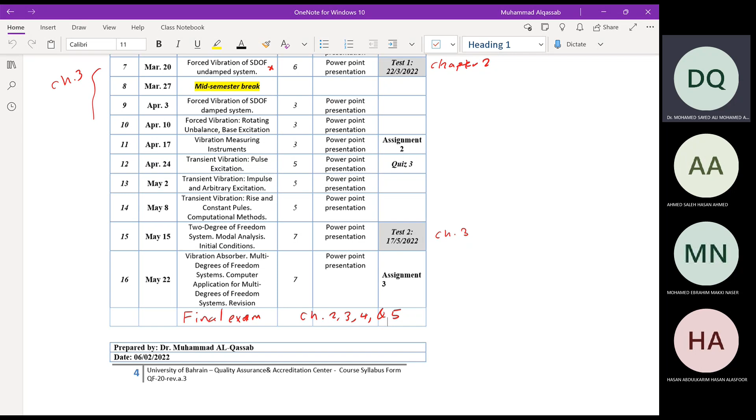Chapter 4 is about vibration, or transient vibration. We saw in chapter 3 that if there is a forced vibration, the total solution consists of two parts: the first is the complementary solution, and the second is the steady state or particular solution. The complementary solution is called the transient solution because it decays with time and vanishes, leaving only the steady state, the particular solution.

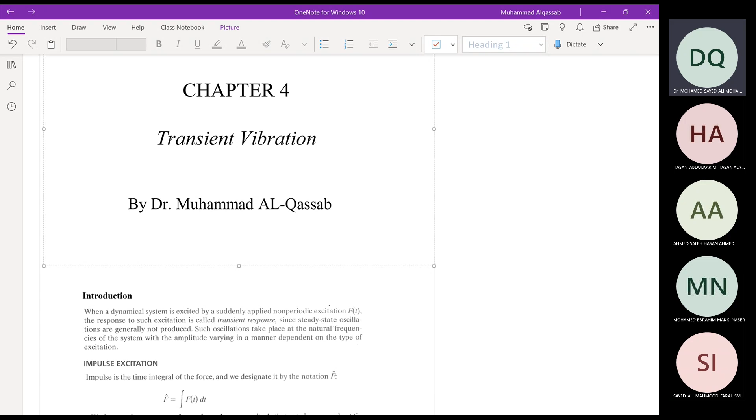Here it is a transient. The reason it is called transient is that it depends on the force. A force applied here will not create the steady state part, the particular solution.

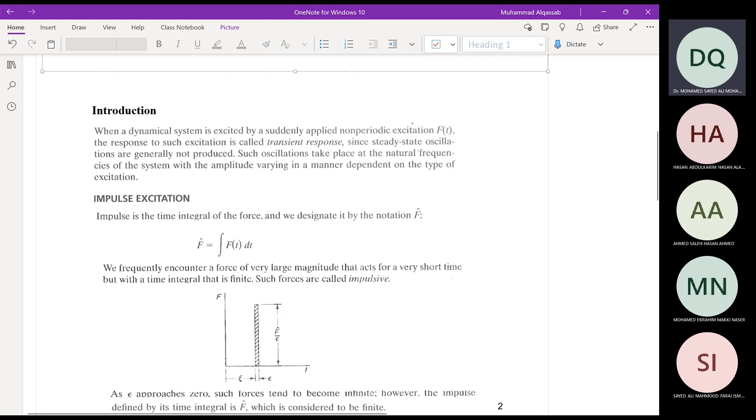The force is applied over a short time or period of time, and then it is removed. It's like a pulse - you put a force and then remove it. That creates a response for the system, exciting only the transient part, the homogeneous part.

The particular solution is not excited, and the vibration will decay with time if there is damping, becoming like free vibration.

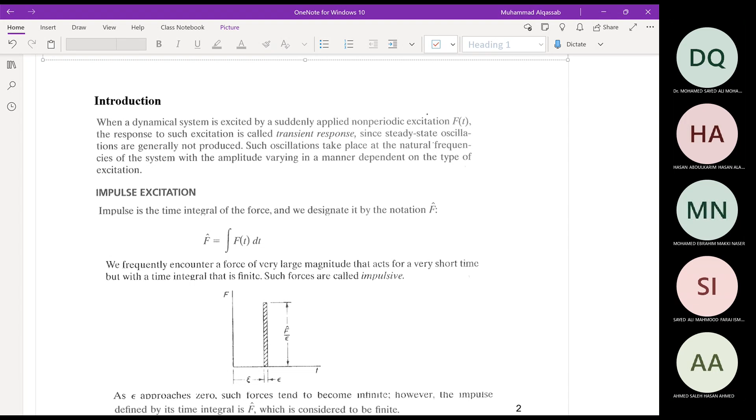When a dynamical system is excited by a suddenly applied non-periodic excitation f of t, the response is called the transient response, since steady-state oscillations are generally not produced because this force is applied over a given period of time. Such oscillations take place at the natural frequencies of the system, with the amplitude varying depending on the type of excitation.

So we will start with impulse excitation, and then we will generalize the excitation to pulses.

The transient here is the response due to a force applied over a period of time, but not periodic - periodic being sine wave, cosine wave, or harmonic forces. In general it is not a periodic force, meaning it doesn't exist all the time and doesn't repeat at equal intervals of time. It's applied over a certain period and then removed.

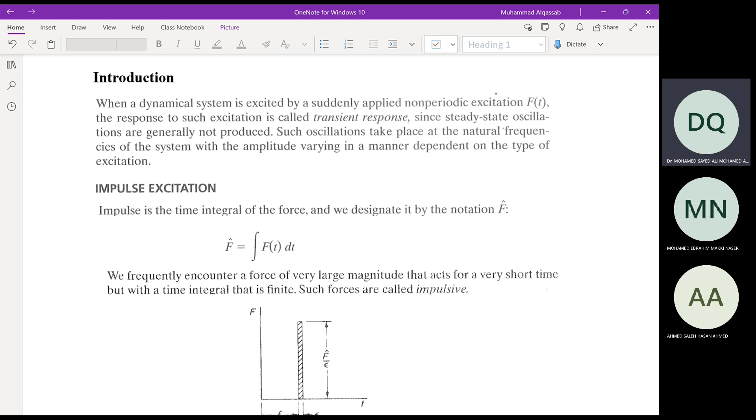So we'll start with impulse excitation. By definition, impulse is the time integral of the force, meaning the integration of f dt over time, given as f hat. That is the definition of the impulse, and the unit of impulse is Newton second.

Okay, because force times time. This is in general—we did this in dynamics, and we use the principle of impulse and momentum in dynamics for particles, maybe chapter 3, I think.

We use a name different, so we give impulse, IMP from 1 to 2. So the impulse means integrating from T1 to T2, if it is over time.

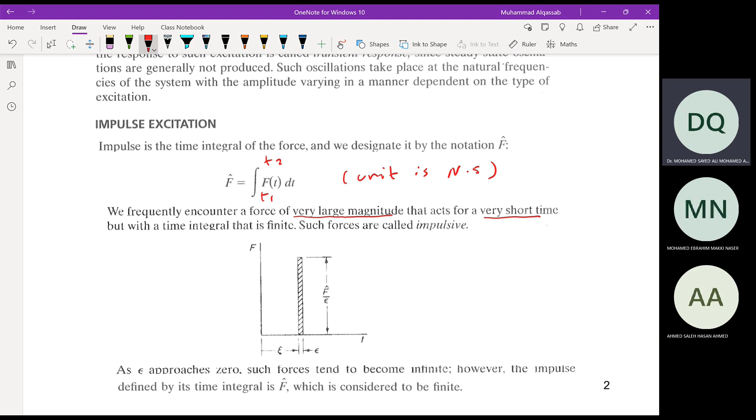Now, if you have a force that is very large in magnitude and applied in very short time, then you create an impulsive force. The impulsive force is very large in magnitude compared with the other forces involved in the system.

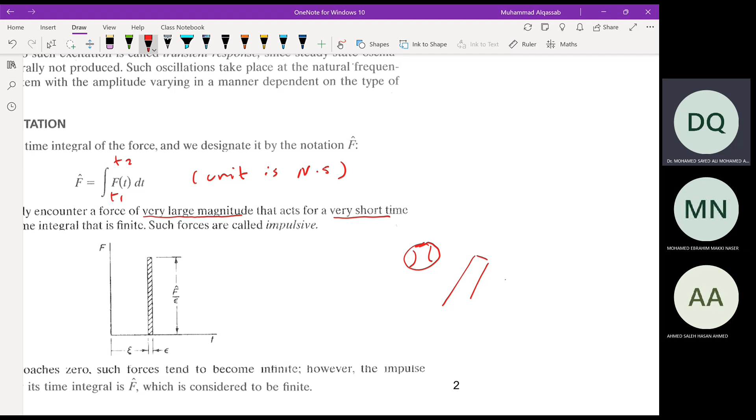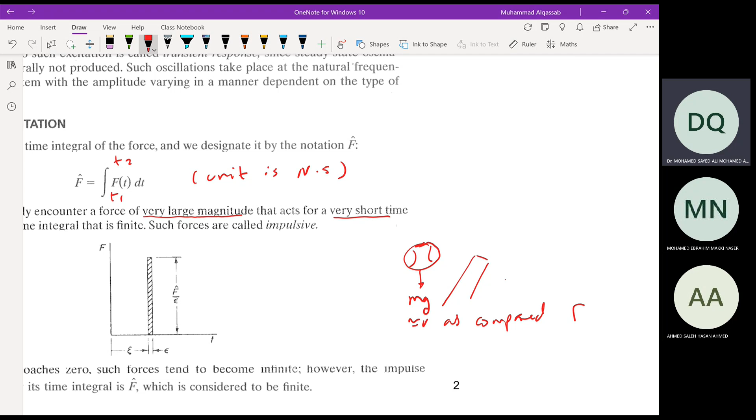An example of this in dynamics is the baseball and the bat. When the bat hits the ball, the force exerted by the bat is very large compared with the weight, so that can be neglected—you can treat it as zero compared with the applied force.

So when the system has a very large force applied in very short time—because with the bat and the ball it will take a fraction of a second to be in contact—the force is high enough to change the direction of motion of the ball as well as its velocity. This is called impulsive force.

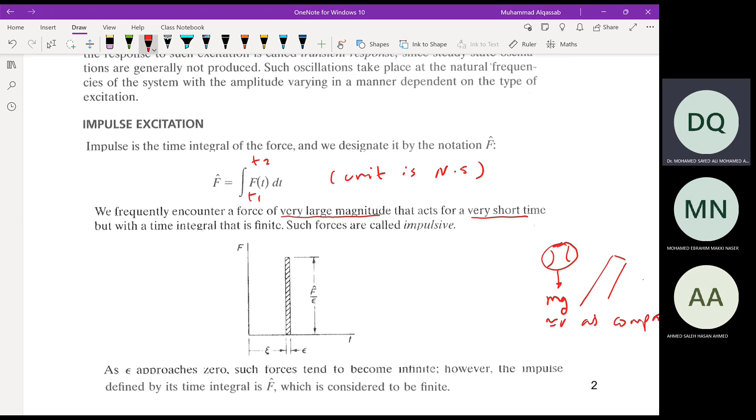We can represent the force over the axis of time. Let's say this is applied at time equal to eta—I will change this character to eta—and duration is epsilon. So it is applied at t equal to eta. It can be applied at t equal to 0 as well, and at t equal to 0 it means it is applied here, so eta equal to 0.

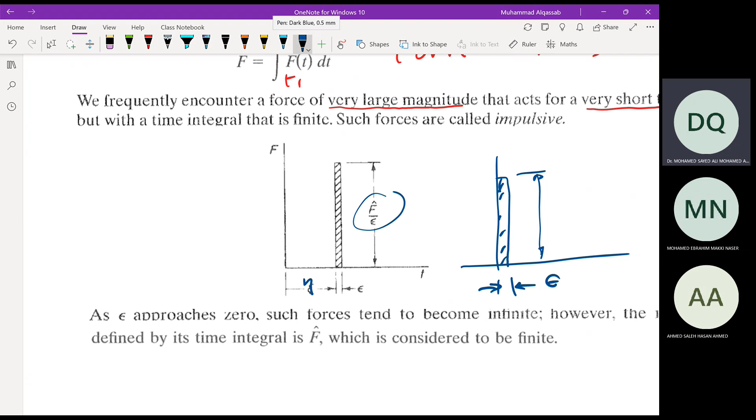The magnitude or the duration is very short, epsilon, which goes to 0, and the magnitude of the force is called infinite. F hat is known and is finite, so the magnitude of the force is given as f hat over epsilon, which is very high as epsilon goes to 0. So as epsilon approaches 0, such forces tend to become infinity. However, the impulse defined by its time integral is f hat, which is considered to be finite.

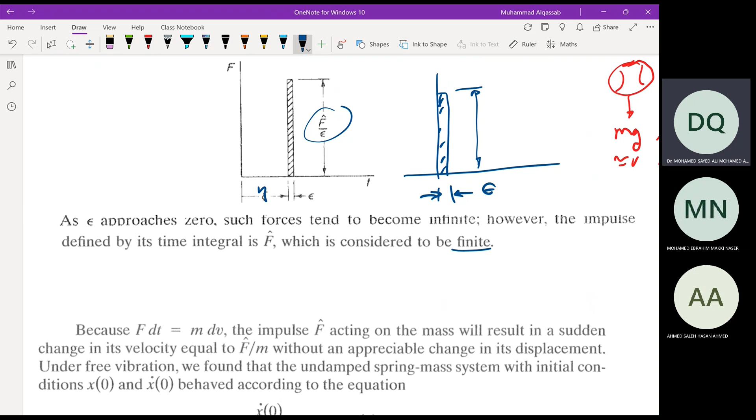So this value is finite and measurable, given by Newton's second law. But if the force itself is very large, it's not given—it is something very large. That is an ideal case, where you assume the force goes to infinity and the duration goes to 0. So imagine the force goes to infinity and is applied in zero time—that becomes something ideal, but this will help us develop a more practical and realistic case.

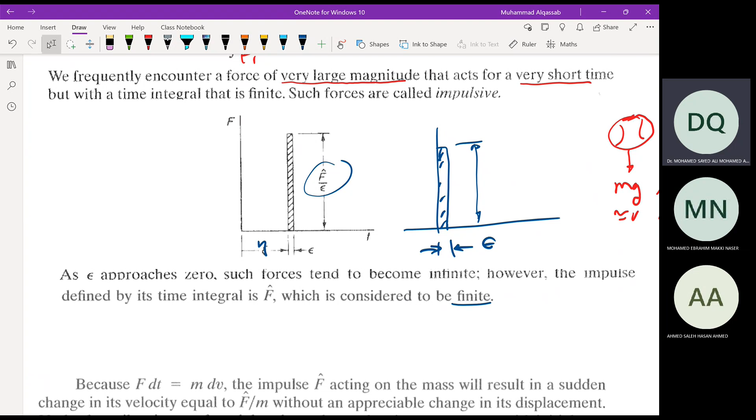So when you apply this on a spring-mass system subjected to impulse—there is a spring with stiffness K and a damper C, and you have a mass M—then this is a force F of t applied here, but this is the impulse force, which means it is applied over, let's say, zero time, at t equal to 0, over a very short period.

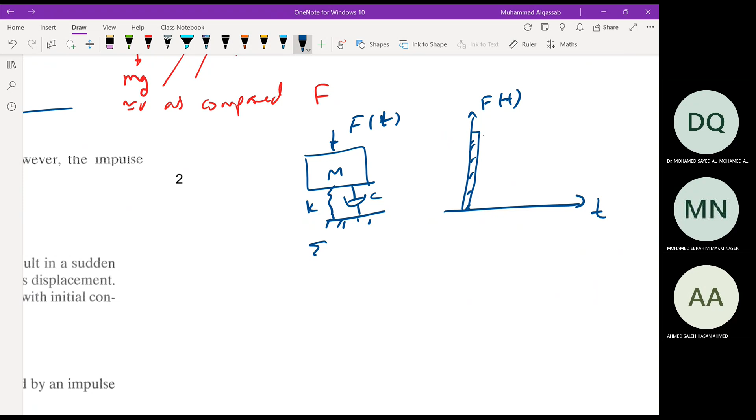So what you can do here is apply Newton's second law: sum of forces equal to m x double dot. Let's say that this system is at rest, with 0 initial displacement and 0 initial velocity. Now the only force here is F, the impulsive force, and M times x double dot.

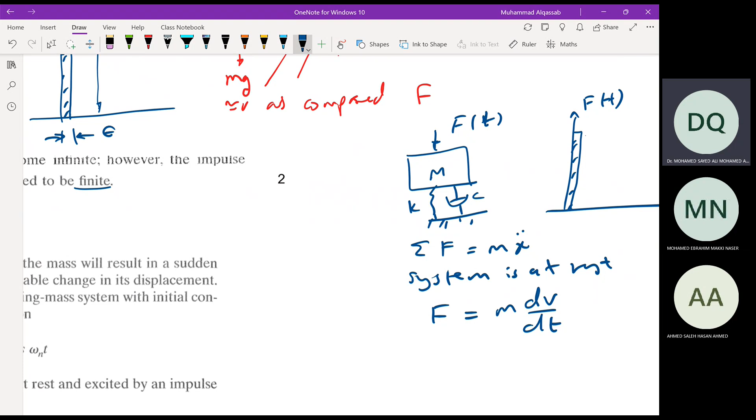We will define this by its definition, which is dv by dt—this is the acceleration—and then you multiply by dt on both sides. You get F times dt equal to m dv. When you integrate both sides from T1 to T2, and since m is constant mass, it will be from V1 to V2.

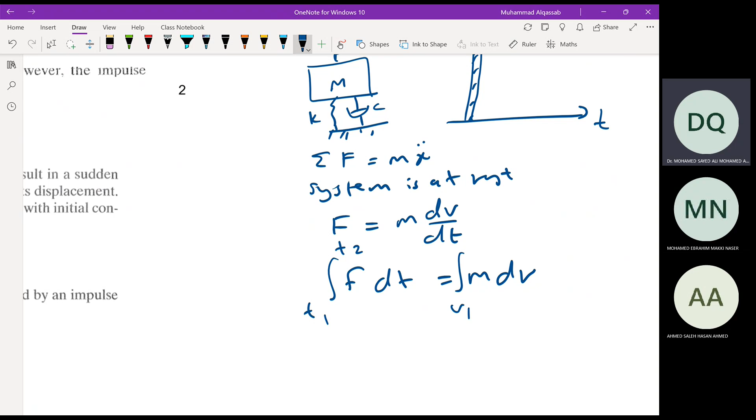Now here the intervals T1 and T2 are two different instants of time. T1 or V1 is the state before applying the impulse, just before. So instant 1 is just before the impulse is applied, and instant 2 is just after the impulse is applied.

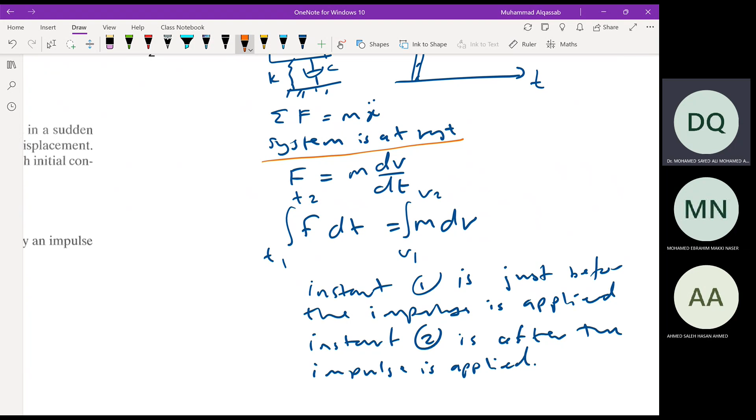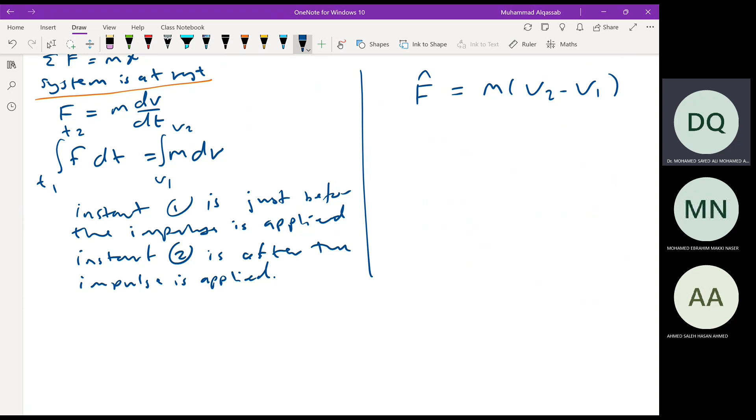So if the system is initially at rest, its initial velocity is 0. This gives us the left-hand side equal to f hat. So f hat equals m(v2 minus v1), and for a system initially at rest, v1 is 0, since this is the velocity before the impulse is applied. And v2 is not 0—as you can see, v2 becomes equal to f hat over m, and this velocity v2 is the velocity just after the impulse.

Okay, just after the impulse is applied. As we said, the impulse is applied over a period of time that approaches zero. So this means v2 becomes the initial velocity of the system, or of the mass, just after the impulse.

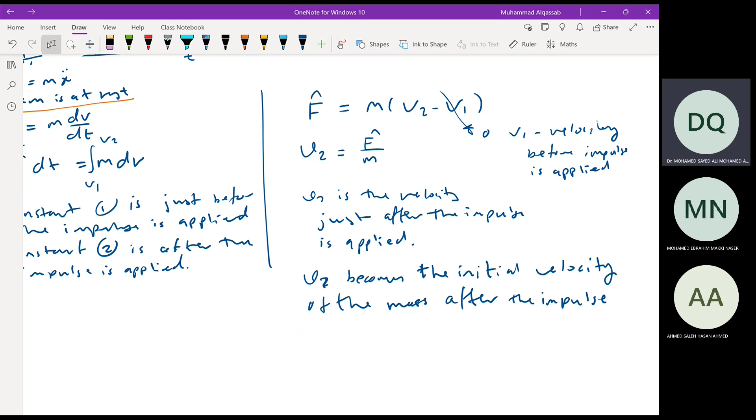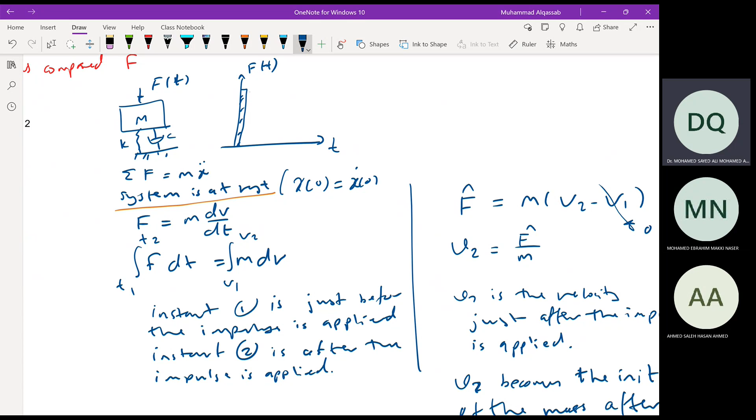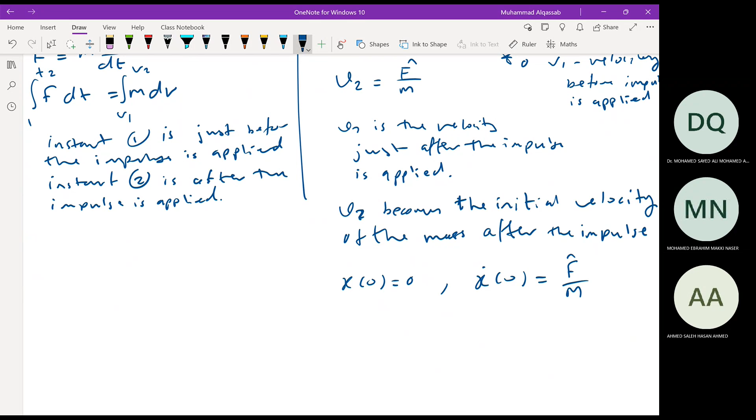So the new initial conditions become: here we said the system is initially at rest, meaning x at 0 is 0 and x dot at 0 is also 0. But after the impulse is applied, the initial conditions become x at 0 stays as it is, 0, however x dot at 0 is equal to f hat over m. Then it becomes an initial value problem. You have the initial conditions without force, because after the impulse the system is oscillating without an applied force on it, so it is under free vibration.

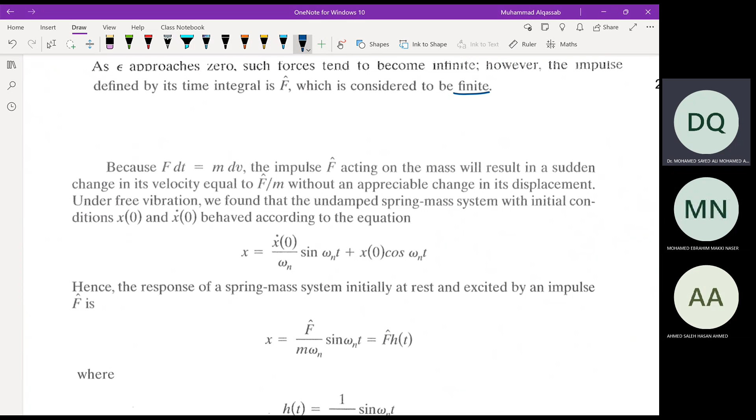This paragraph says, because f dt equal to m dv, the impulse f hat acting on the mass will result in a sudden change in its velocity equal to f hat over m, without an appreciable change in its displacement. Under free vibration, we found that the undamped spring mass system with initial conditions x at 0 and x dot at 0 behaves according to the equation. You can check chapter 2.

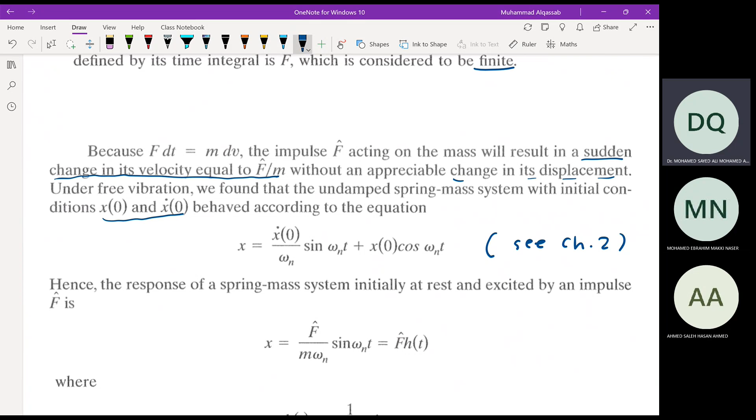This was the equation of the response for an undamped system: x equal to x dot at 0 divided by omega n, sine omega n t, plus x at 0 cosine omega n t. If the system is initially at rest and excited by impulse f hat, then you can write x equal to f hat over m omega n, because x at 0 becomes 0, and we have only x dot at 0 over omega n, and x dot at 0 is f hat over m.

So we have x becomes x dot at 0 divided by omega n, sine omega n t, and this will lead to replacing x dot with f hat over m. We will have x equal to f hat over m omega n, sine omega n t.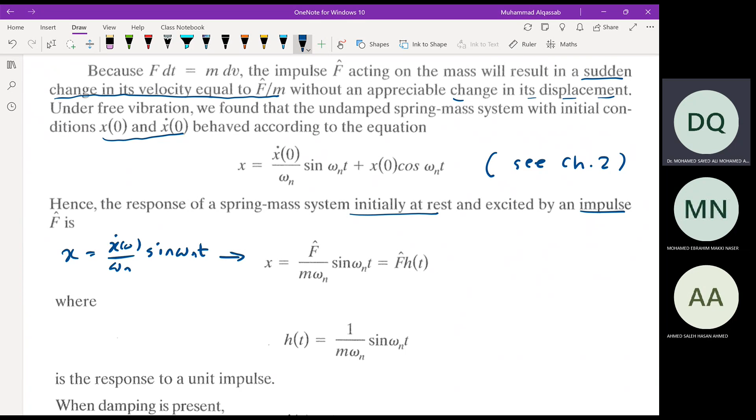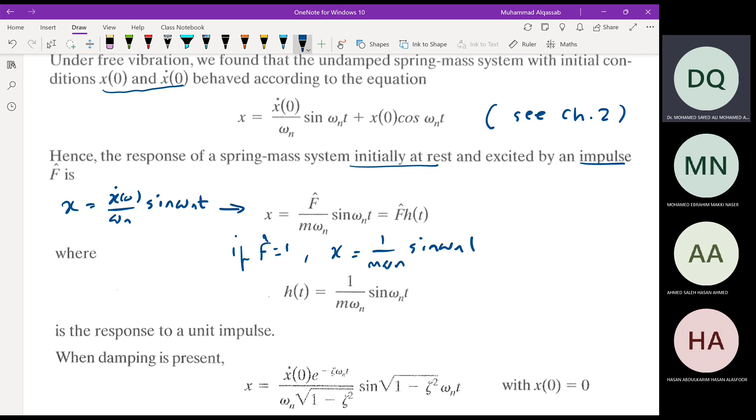Then we can write also that x equal to f hat times h of t, where h of t is 1 over m omega n, sine omega n t, the response due to a unit impulse. So if f hat equal to 1, then what you get is x equal to 1 over m omega n, sine omega n t, which is called h of t, the response to a unit impulse.

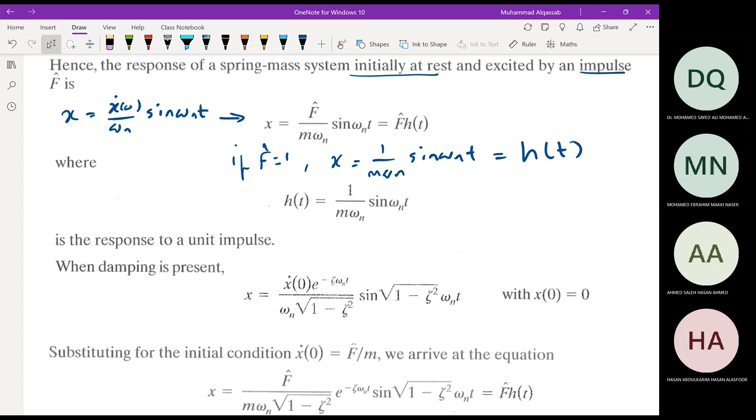If you have the underdamped case, when damping is present, specifically for zeta less than 1, from chapter 2 as well, the response to initial conditions of underdamped is given by x dot at 0, e to the power minus zeta omega n t, over omega n square root of 1 minus zeta squared, sine square root of 1 minus zeta squared omega n t, plus x0 cosine omega square root of 1 minus zeta squared omega n t, but that term is omitted here because x at 0 is 0.

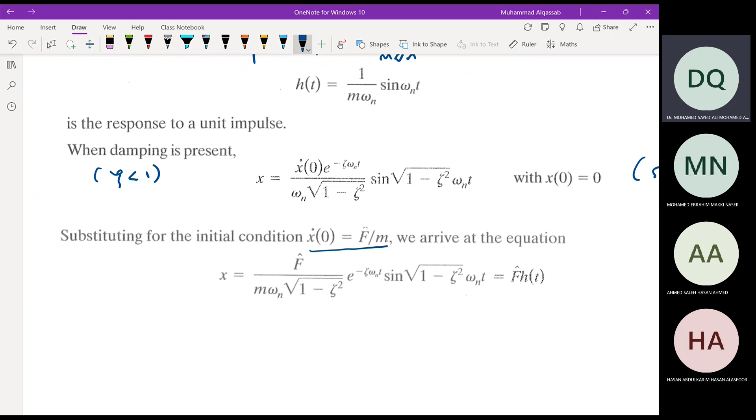Again, you can write, if this is an impulse, then you can change the initial velocity to f hat over m, because the impulse is applied and removed before the system starts to oscillate, and that will give a change in the initial condition, which is the initial velocity. So it does not depend on the system. The system is excited by impulse, and then it will respond according to the change in the initial velocity.

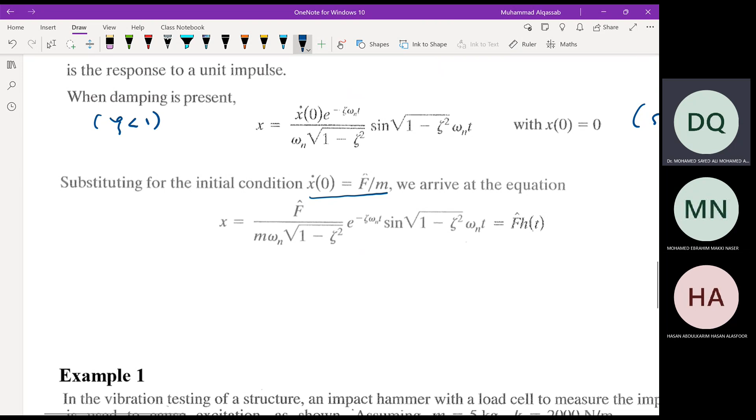So here, for the underdamped case, when x dot 0 equal f hat over m, x becomes f hat over m omega n square root of 1 minus zeta squared, e to the power minus zeta omega n t, sine square root of 1 minus zeta squared omega n t, which can also be written as f hat times h of t, but h of t here is not the same as the one above. h of t is 1 over m omega n square root of 1 minus zeta squared, e to the power minus zeta omega n t, sine square root of 1 minus zeta squared omega n t.

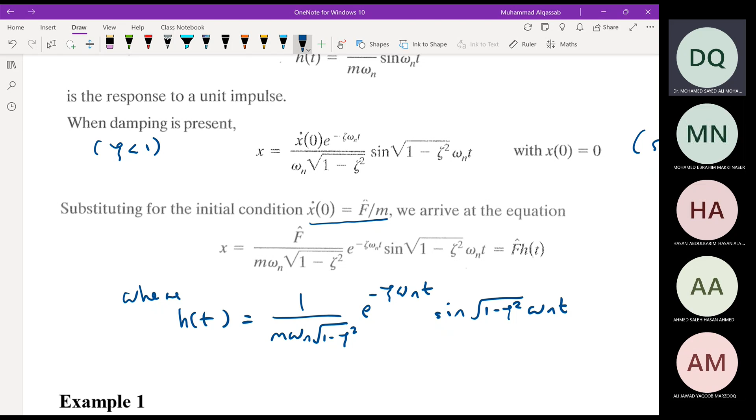When you put f hat equal to 1, that is the response due to a unit impulse of an underdamped system. We can make this also shorter when we use the definition of omega d. So this will be 1 over m omega d, e to the power minus zeta omega n t. Let me take this down.

e to the power minus zeta omega n t sine omega d t. For underdamped, omega d is equal to omega n square root of 1 minus zeta squared.

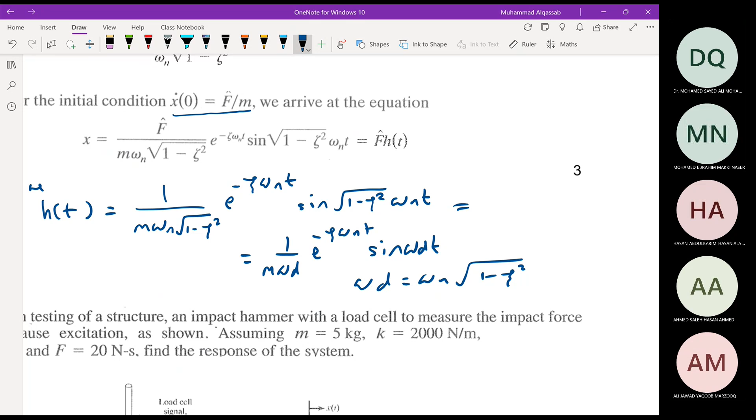Here is an example in the vibration testing of a structure. Why there is testing of the structure is usually because you suspect the vibration goes under resonance, or you want to find out the characteristic of the structure. The characteristics to be found are either omega n or the damping ratio zeta.

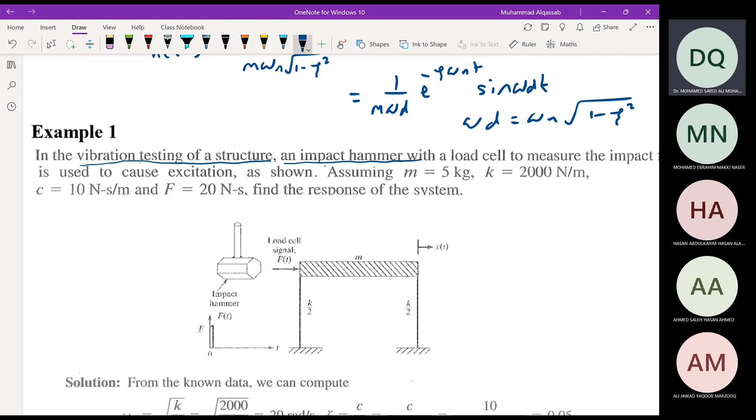So you can apply an impact hammer, this is called impact testing. We use a hammer, but this hammer is not a normal one. It has a load cell which can measure the impact and the force, and calculate for you the impulse itself.

In the vibration testing of a structure, an impact hammer with a load cell to measure the impact is used to cause the excitation as shown. So the source of excitation is impulse here, produced by the hammer by impacting, and impacting takes just a very short time, like hitting the structure.

Assuming the structure here is as shown in the diagram, made of columns like cantilever beams, it is given as k over 2, so we don't have to calculate the value of k since no other parameters are given. So the cantilever beam or columns will act like springs of stiffness k over 2, supporting the mass m.

The value of m is 5 kilogram. The value of k is 2000 Newton per meter. The value of c, assuming that the columns will have damping, equals 10 Newton second per meter. And the impulse as produced or measured by the load cell is 20 Newton second. This is F hat.

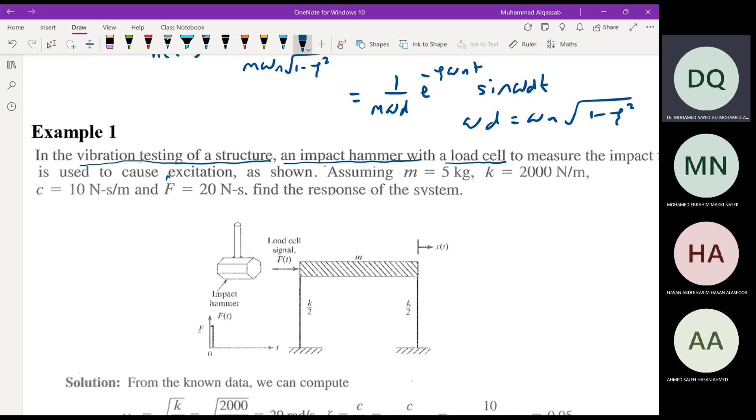Find the response of the system. The response, which means to find x as a function of time after the impact.

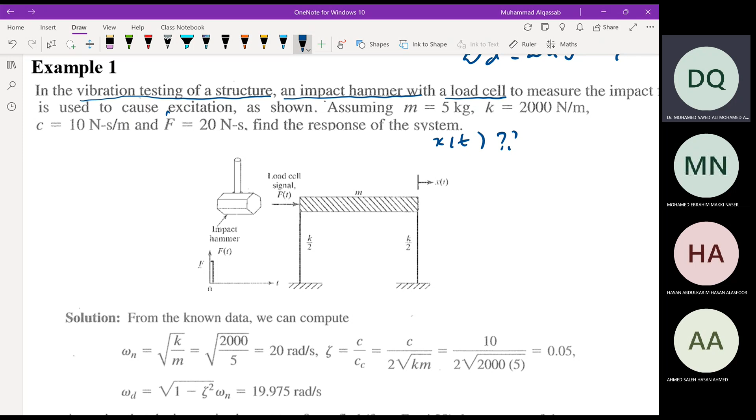From the system we have omega n equal square root of k over m. You can take a model of this, and then you have the impulse, f of t. So it is a spring mass damper system.

Omega n equals square root of k over m, square root of 2000 over 5, becomes 20 radian per second. Zeta is c over cc, c over 2 square root of km, becomes 10 over 2 square root of 2000 times 5, becomes 0.05, which is underdamped. So this means this is underdamped.

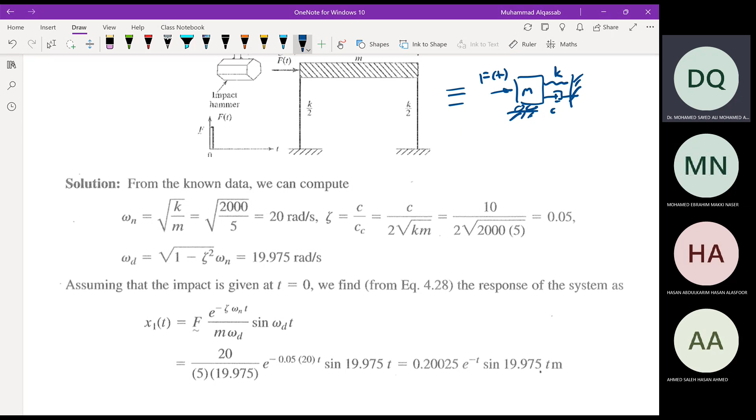And then you can calculate omega d, square root of 1 minus zeta squared times omega n, becomes 19.975 radian per second.

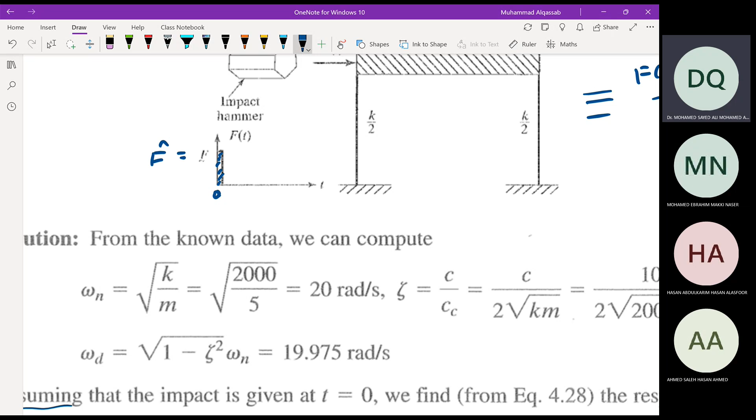Assuming that the impact is given at t equal to 0, as you can see from here. This is 0 here, and this is the impulse at t equal to 0, and this is f underline, f hat. We used to call it f hat, but this is from another reference. It is used representing the impulse with underline.

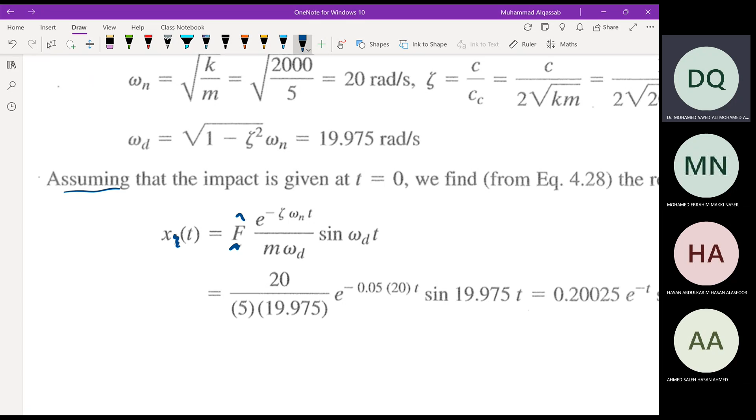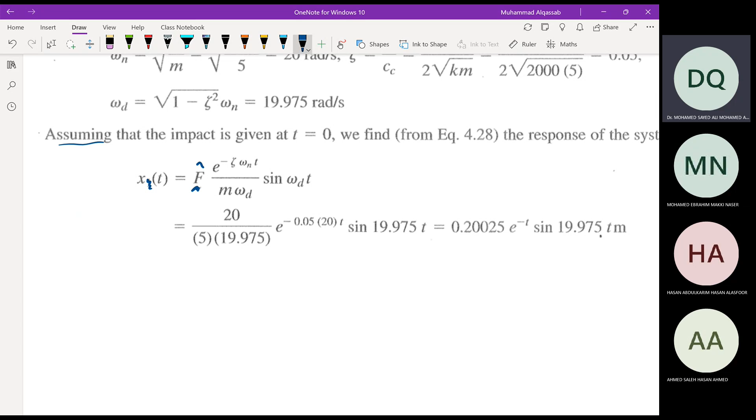Since this is underdamped, x equals f hat e to the power minus zeta omega n t divided by m omega d, sine omega d t, and then we just put the values. So 20 divided by 5 times 19.975, e to the power minus 0.05 times 20 t, sine 19.975 t, which becomes 0.2 e to the power minus t sine 19.975 t, and this is in meters.

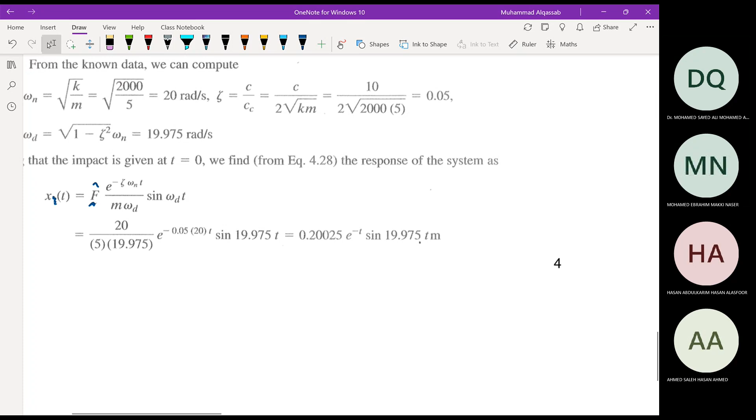Next time we will talk about a more general, more realistic type of excitation, which will be a force applied over a period of time, but not periodic.